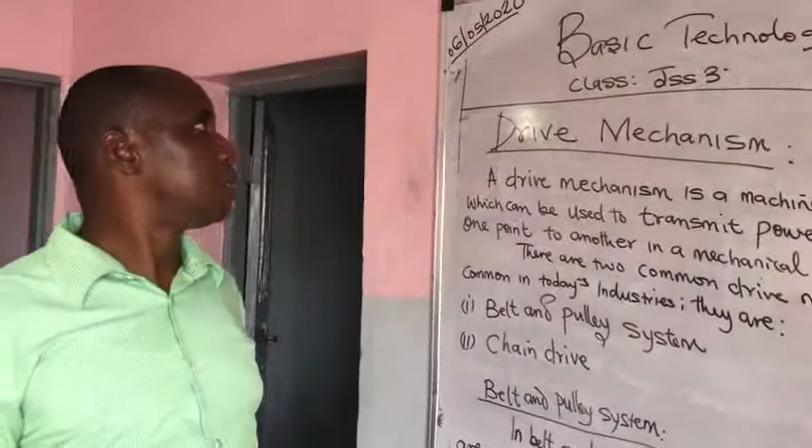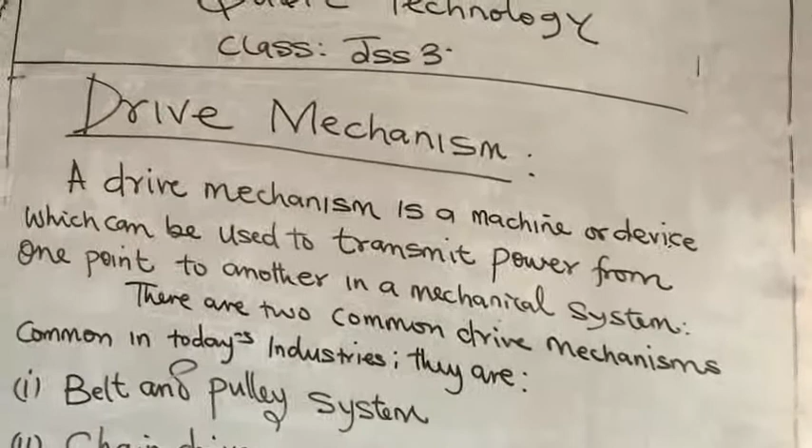We are treating the topic, drive mechanisms. What is a drive mechanism?

Sometimes we are common with some machines around us, but we don't know how they operate. As a technologist, it is important that you should know how they work, in case somebody asks you at home and you need to explain the principle behind the

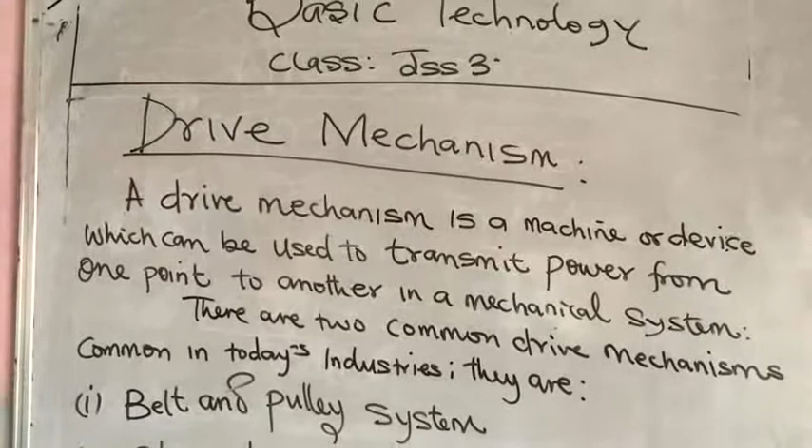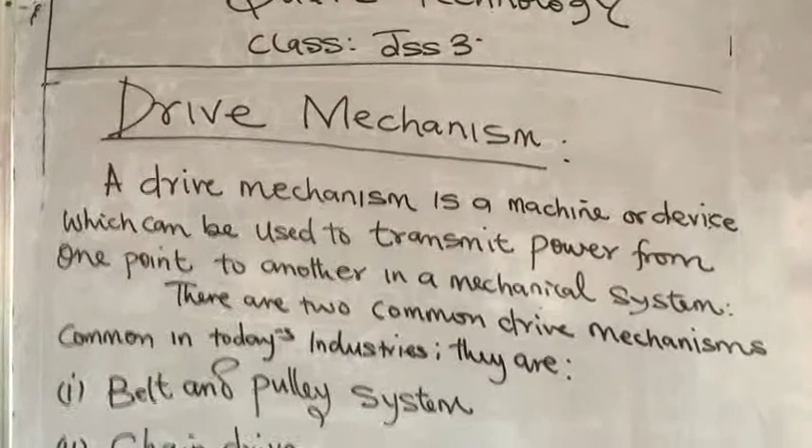working of that machine. Actually, a drive mechanism is a machine or device which can be used to transmit power from one point to another in the mechanical system. There are two common drive mechanisms in today's industries.

They are: 1. Belt and pulley system. 2. Chain drive.

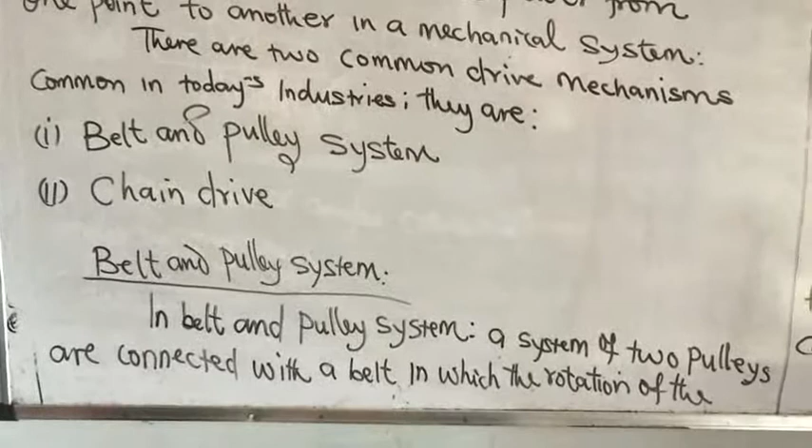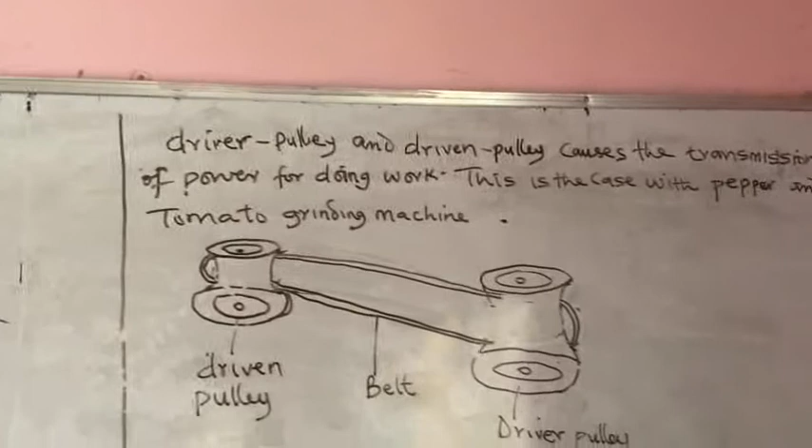Let's look at the belt and pulley system. In this system, two pulleys are connected with a belt, in which the rotation of the driver pulley and the driven pulley causes the transmission of power for doing work.

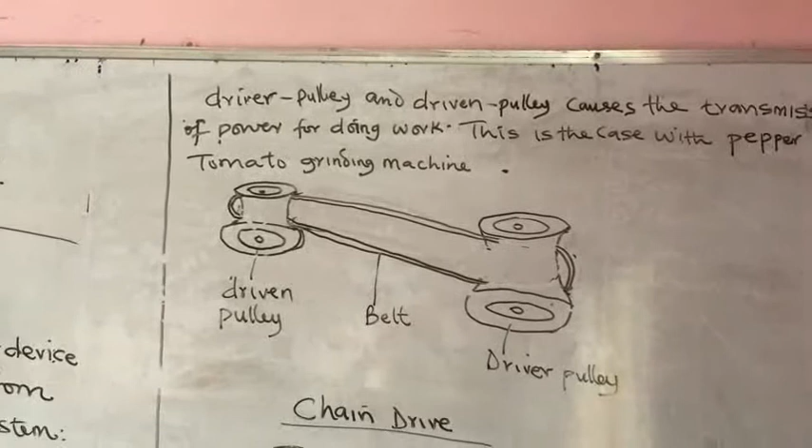This is the case with the pepper and tomato grinding machine. Students, I know you are familiar with the machine they use to grind pepper and tomato in their local market. If you come very close to it, go check it out.

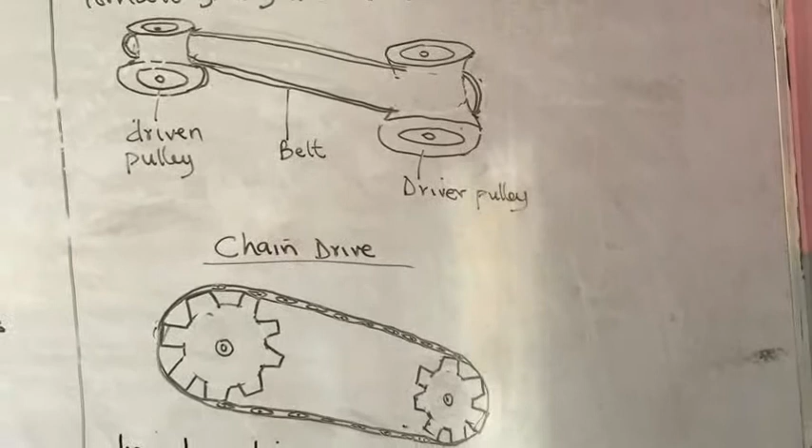You find out that there are two rolling plates or discs. These two rolling plates, one is bigger than the other.

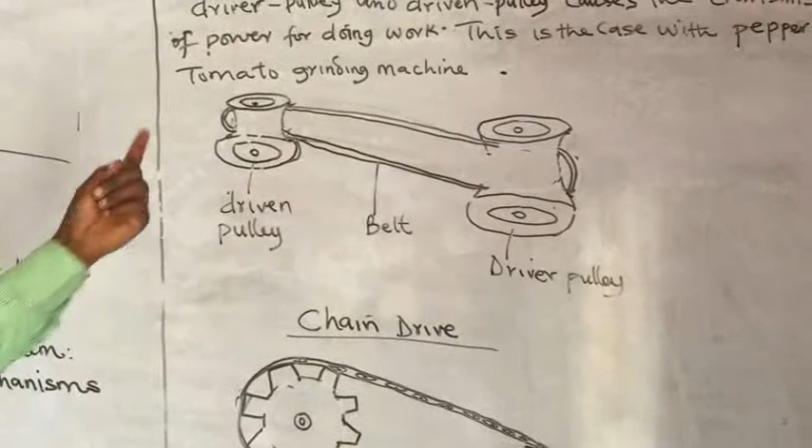The bigger one is called the driver pulley, while the smaller one is called the driven pulley. Of course, you see that they use a belt to roll the two together. That is the belt you are seeing here.

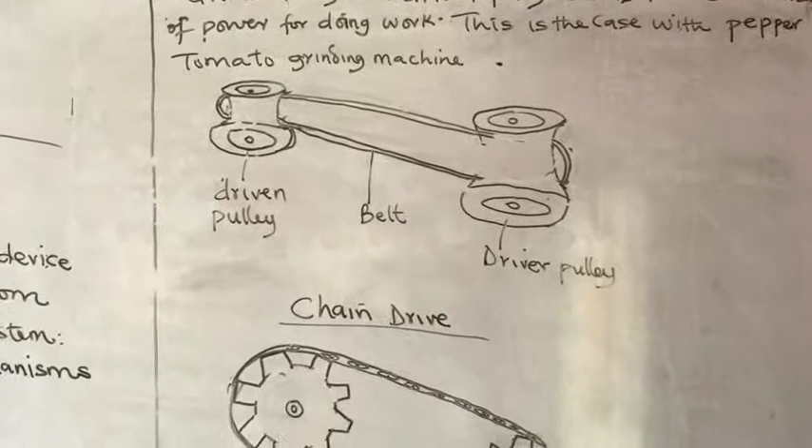Now, the rotation of these two discs, the driver and the driven pulley, causes power to be released or transmitted that can be used for grinding that pepper and tomato you see most of the time in the market.

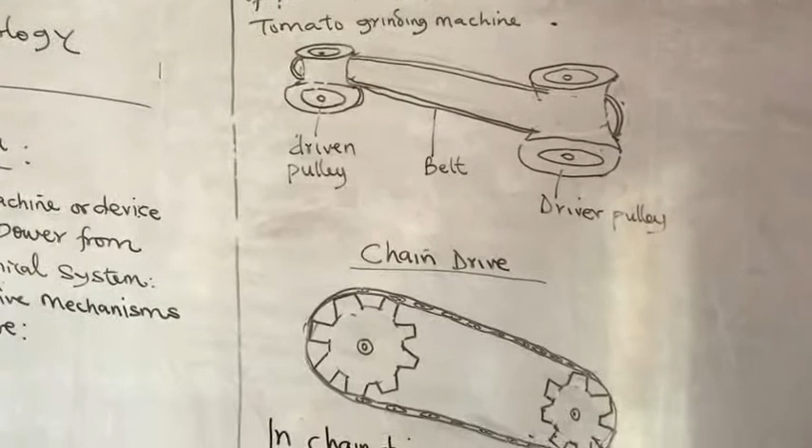Now, there are things that you must do to make this machine more efficient.

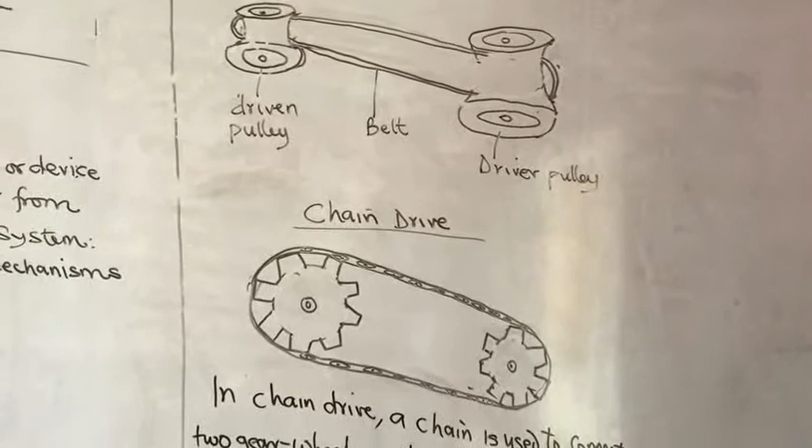Number one, the driver must be bigger than the driven. That's what we achieve here, because the bigger the driver, the stronger it is to drive the driven.

Because the driven, which is the smaller one, go and check it - that's where they normally attach the hopper for the grinding of pepper.

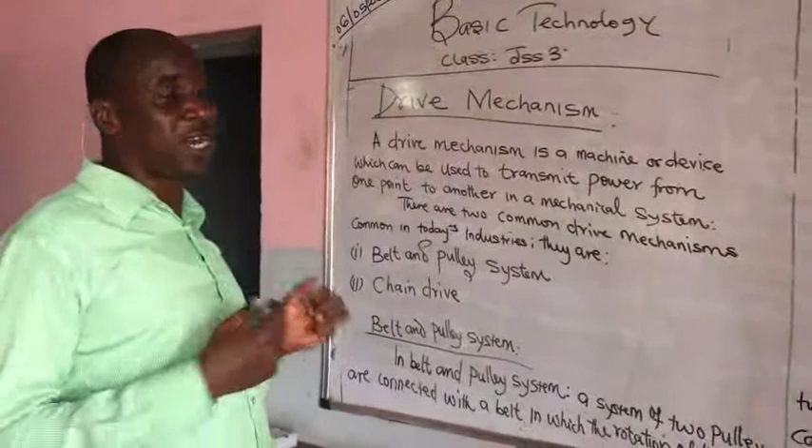That's where they normally grind it, because that one should be very fast. So to achieve that, we must make the driver very big so that it can drive that smaller one faster for the grinding.

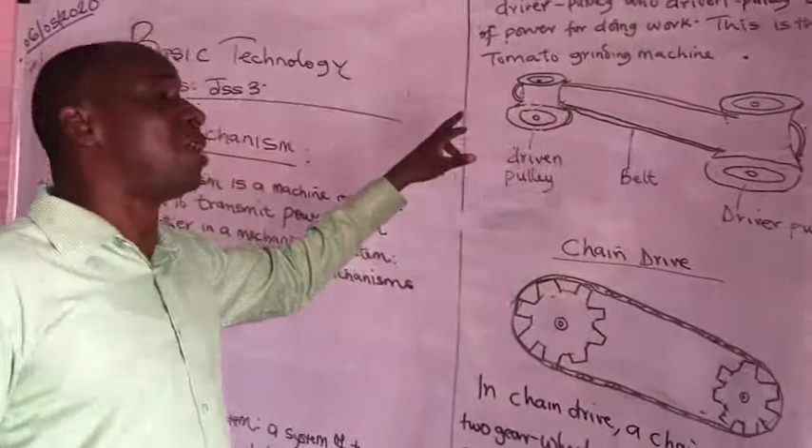So in other words, we call it the gear speed ratio. The gear speed ratio.

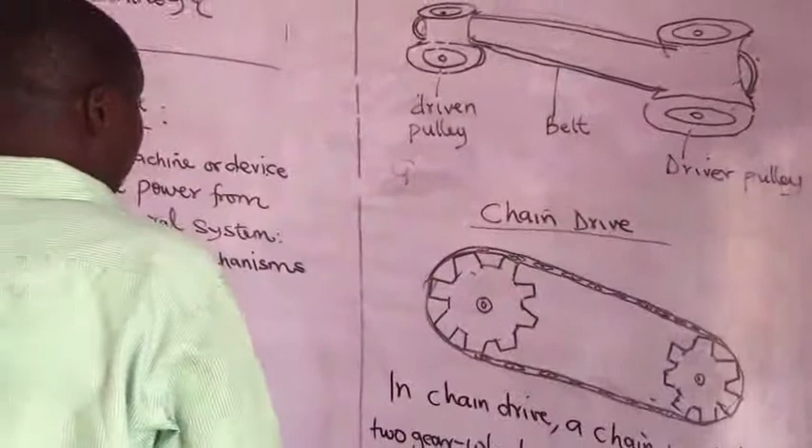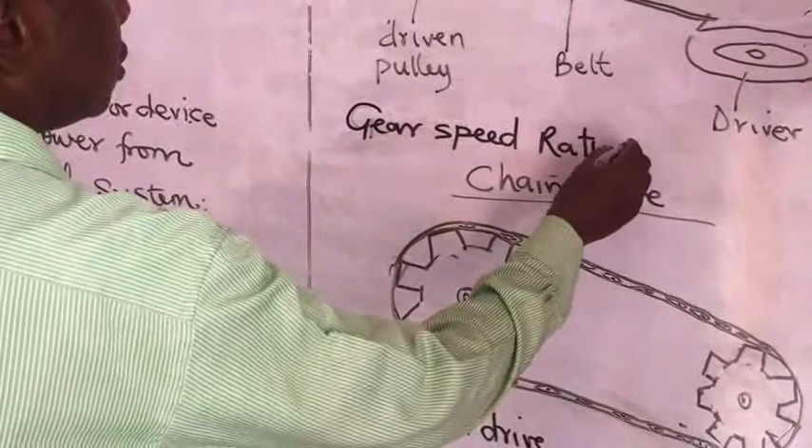So the gear speed ratio is actually talking about the speed ratio between the driver pulley and the driven pulley.

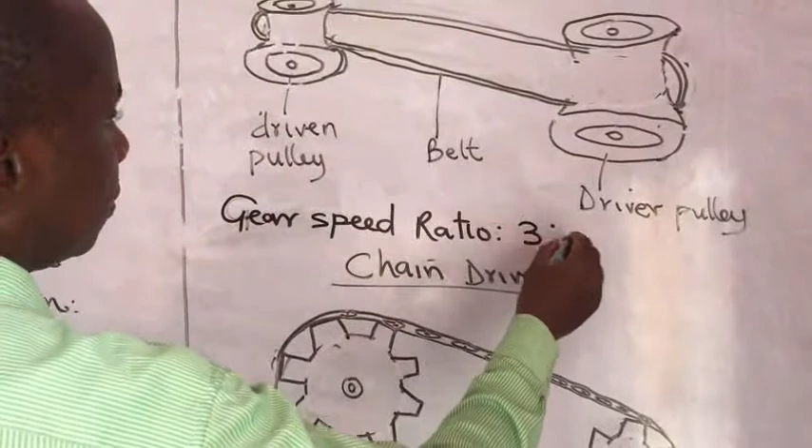In other words, we have speed ratio of 3:1. Sometimes we can have speed ratio of 2:1. We can have speed ratio of 4:1.

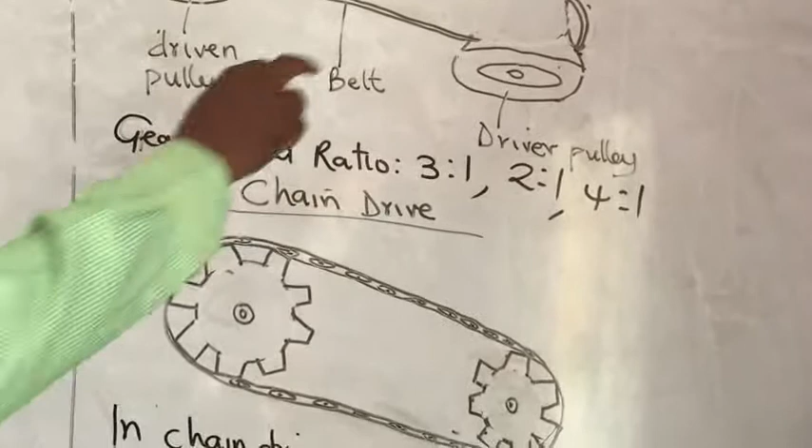What this is saying is that for a gear speed ratio of 3:1, for every turning of the driver pulley, the driven pulley will turn 3 times.

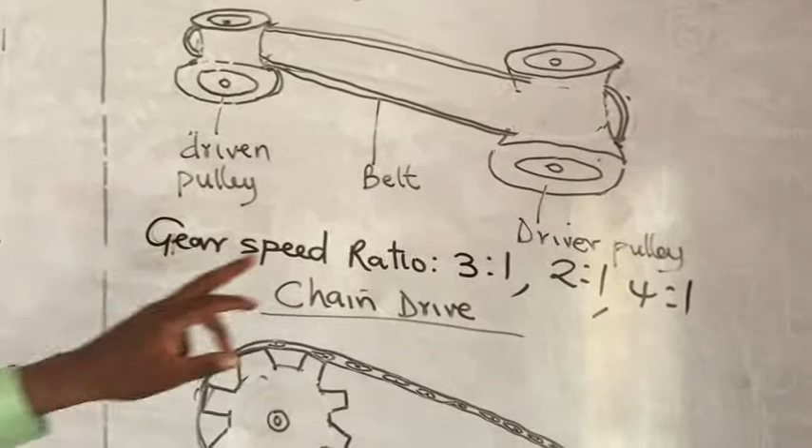That's what 3:1 means - when the big one turns once, it should make the small one turn 3 times, because that's where the power is to grind the pepper. So any tomato or pepper you put there will be grinded as fast as possible. That's the gear speed ratio.

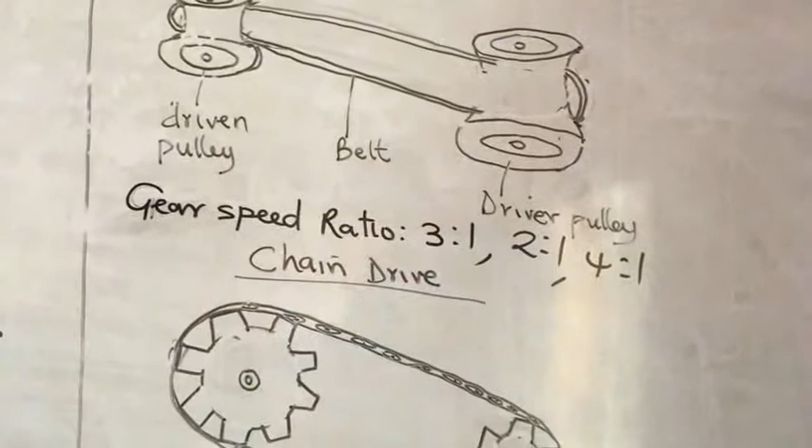We have a gear speed ratio of 2:1, which means for every turning of the driver pulley, the driven should turn twice. You'll find that the strongest one is 4:1.

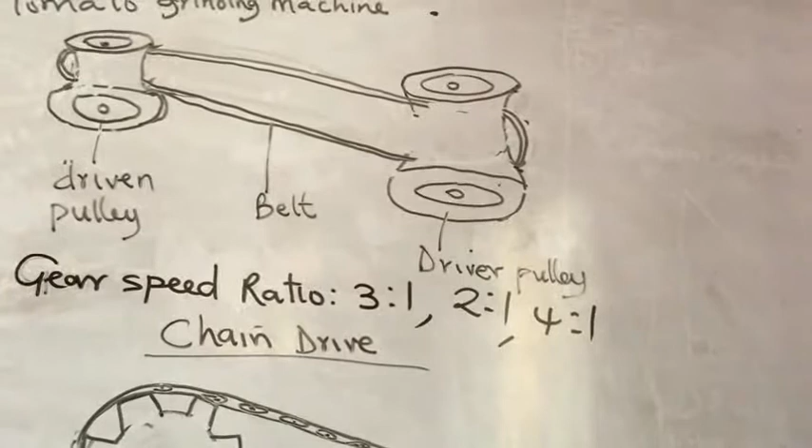4:1 means for every turning of the driver, the driven should turn 4 times, and that must be very powerful. So that's what we call the gear speed ratio.

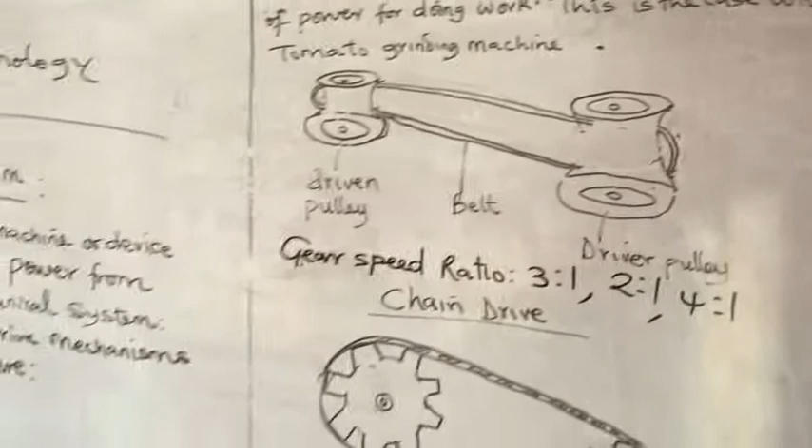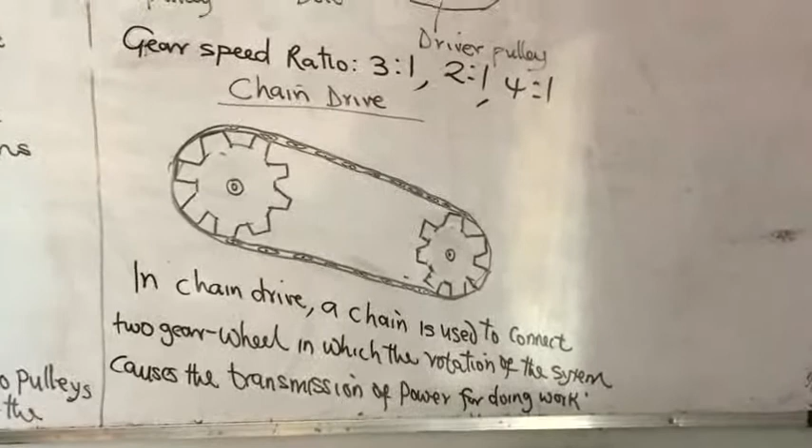Now we'll come to the chain drive. The chain drive is similar to the belt and pulley, only that here you use a chain to connect the two. Of course, here you have the gears

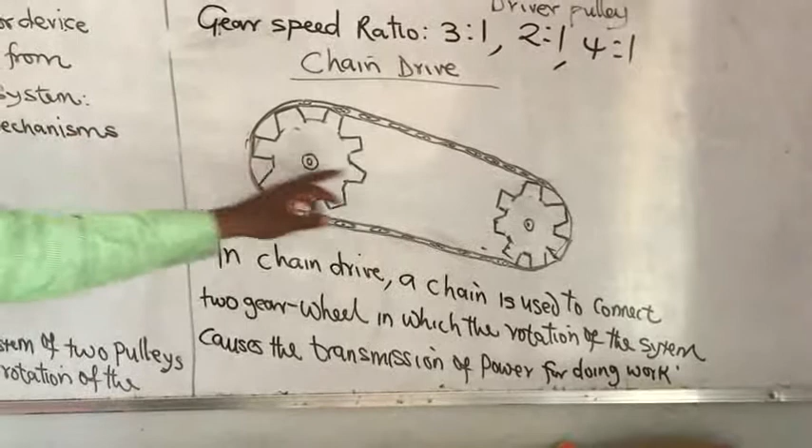which we also call the driver and the driven. This is the driver, this is the driven, and the two are connected with a chain. That's just the difference between the two.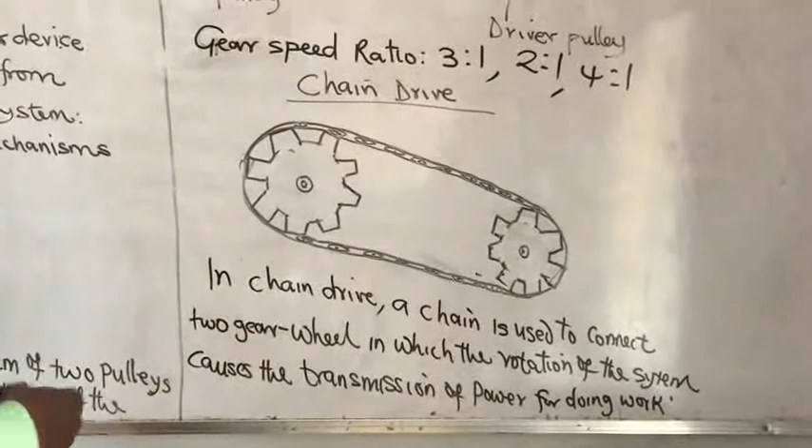So in chain drive, a chain is used to connect two gear wheels, in which the rotation of the system causes transmission of power for doing work. That's just the difference between the two.

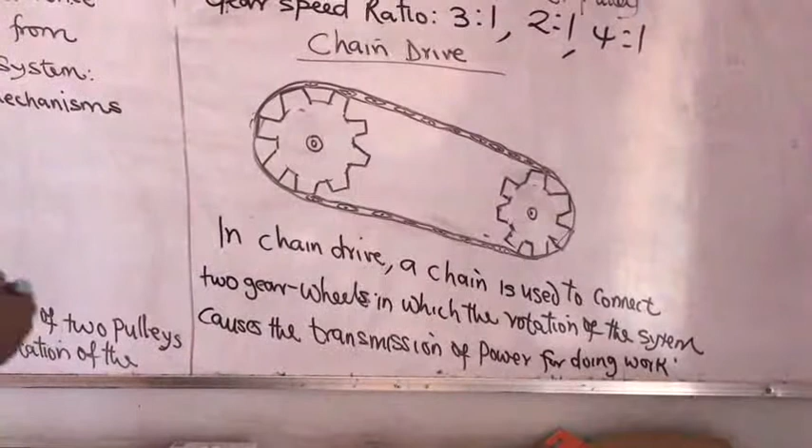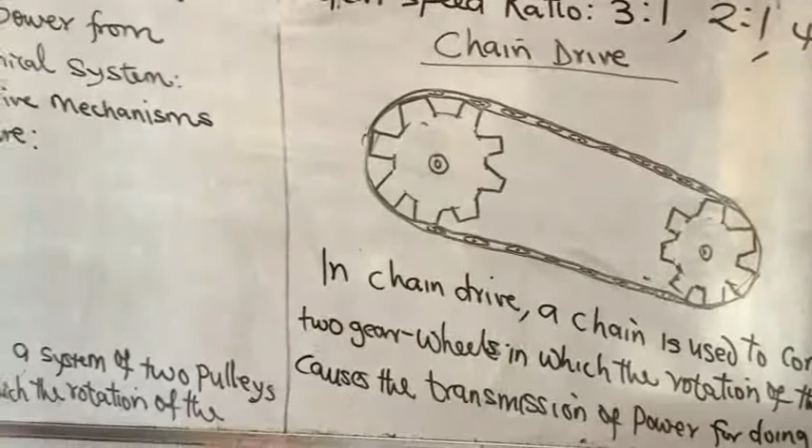Of course, there's an advantage of using the chain drive over belt and pulley, and vice versa. The advantage of the chain drive is that it can carry more load.

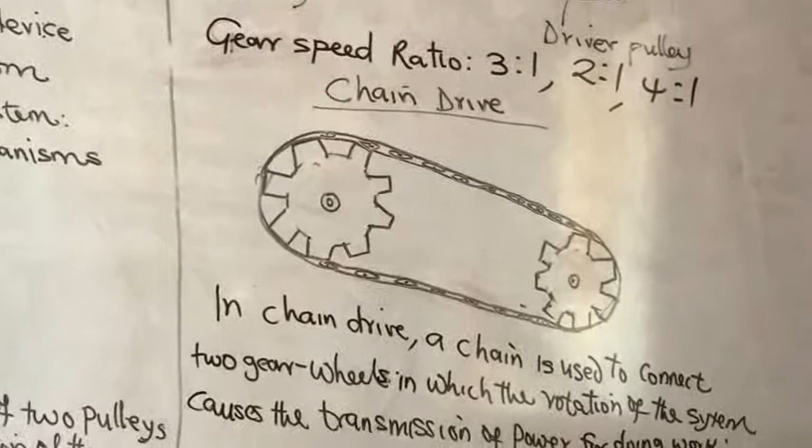If you go to the market, if you put too many tomatoes in the hopper, the machine will stop working because you're giving it a load that the belt can no longer turn.

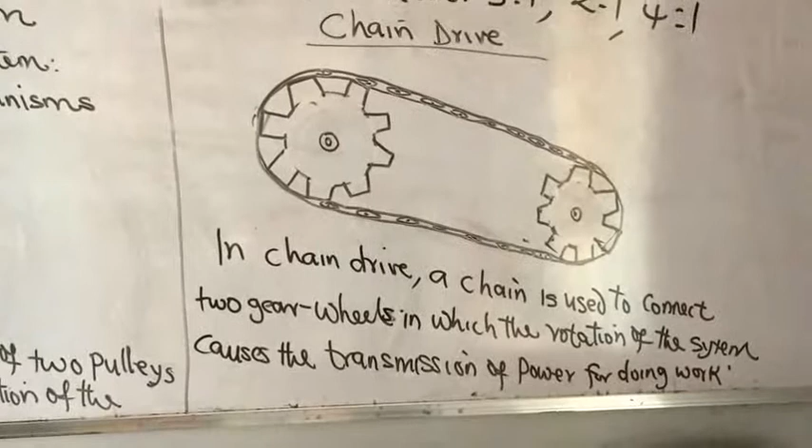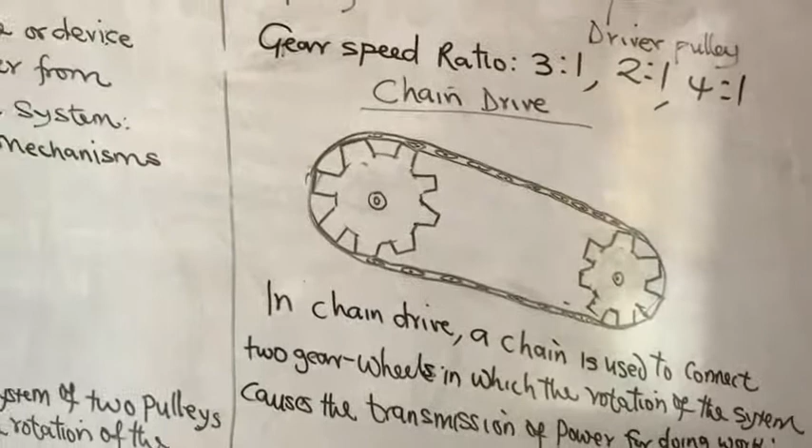The belt becomes weak. That is belt and pulley for you - if you give it a load it cannot carry, it will stop. But unlike the chain drive, no matter the load you give it, it can grind it. It can carry the load. That's the advantage of using the chain drive.

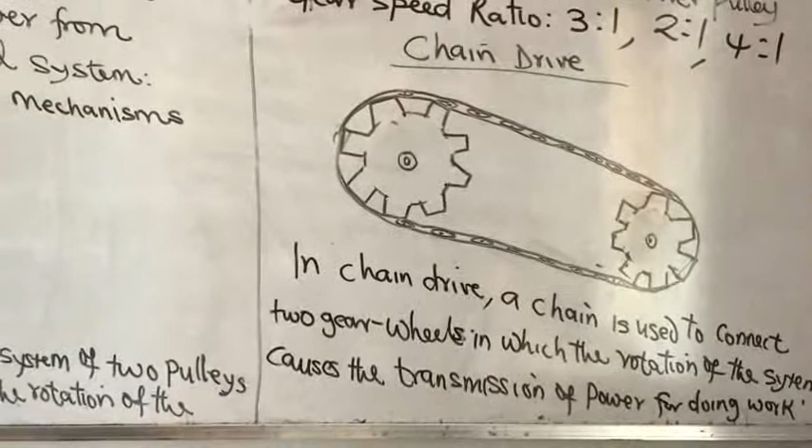But the disadvantage of using chain drive is that it's very expensive to buy, number one. Two, it's expensive to maintain, because of the teeth of the gear and the chain, there's a need to use oil from time to time to oil it. We call it lubrication.

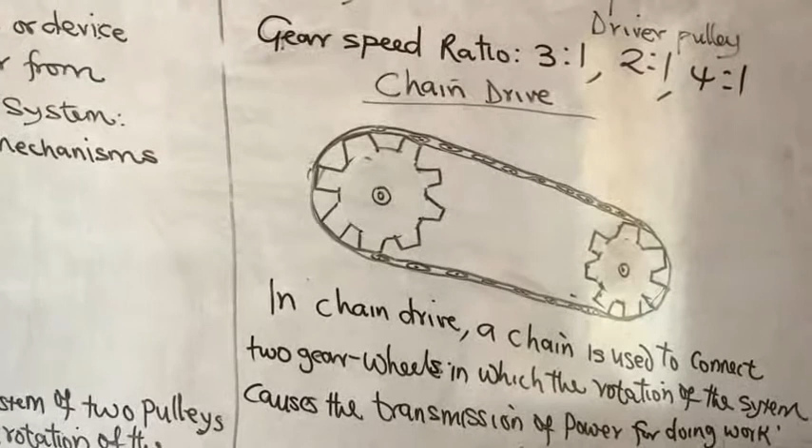And that makes the system very expensive to run. Unlike the belt and pulley, you don't need oil, you don't need lubrication. It's cheap to run, it's cheap to maintain. That's just the difference between the two.

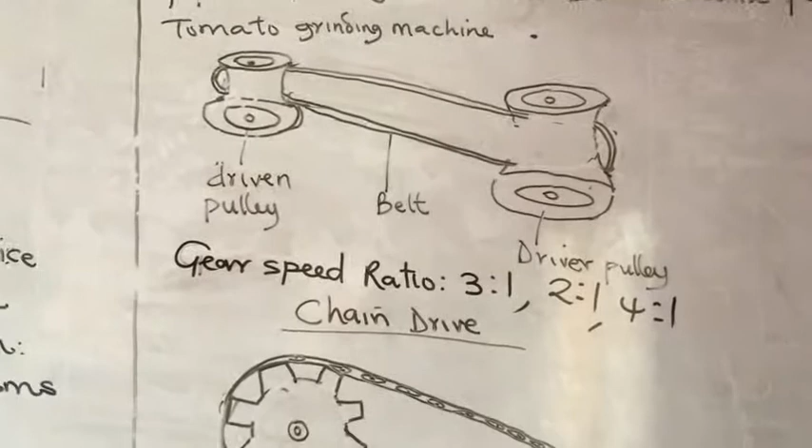So, in other words, the belt and pulley is more common because you can buy it and run it the whole year without spending one kobo on maintenance. That's why people always want to buy it.

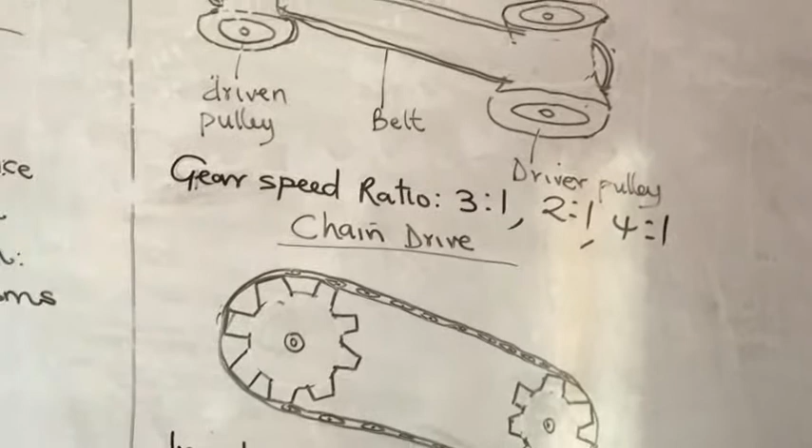Go to the market, you will hardly see the chain drive, you always see the belt and pulley system. So that is the difference in operation between the two.

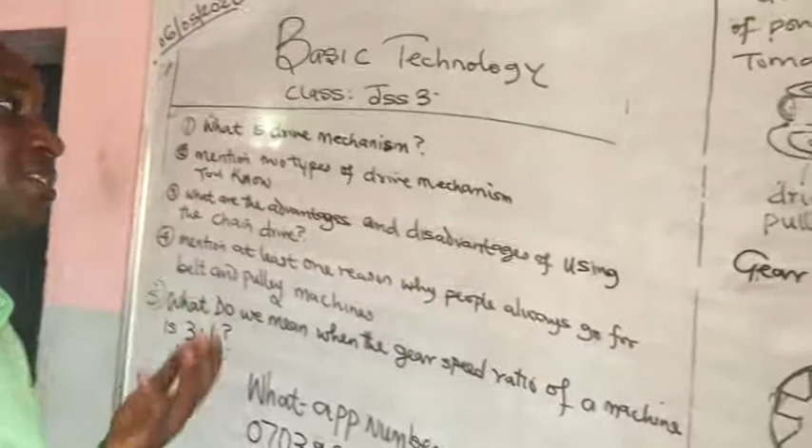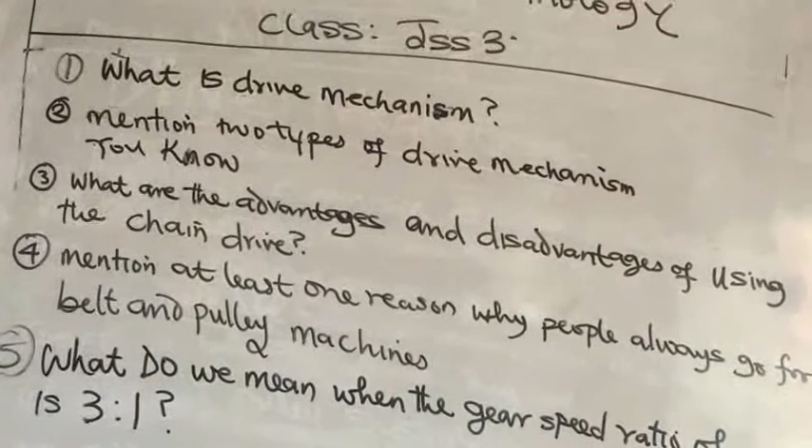I have some questions for you as classwork. Number one: what is a drive mechanism? Number two: mention 2 types of drive mechanism you know.

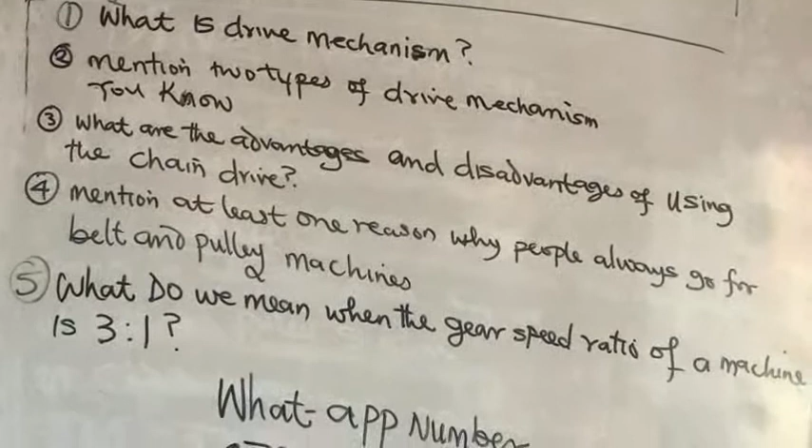Number three: what are the advantages and disadvantages of using the chain drive? Number four: mention at least one reason why people always go for belt and pulley machines.

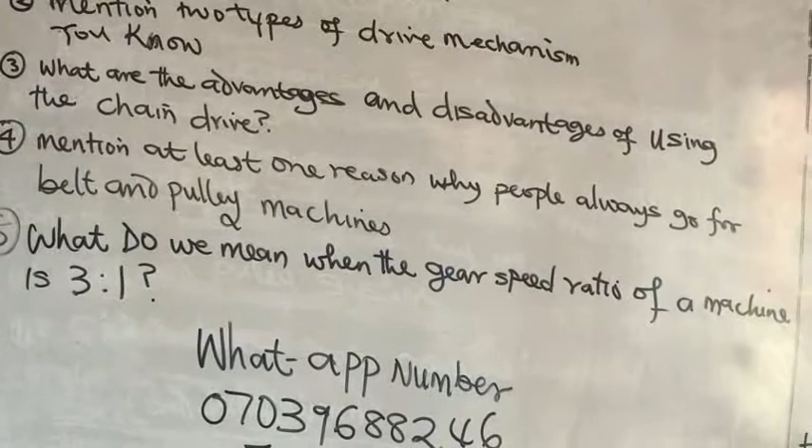Number five: what do we mean when the gear speed ratio of a machine is 3:1? Those are your questions. Direct your answers to the WhatsApp number